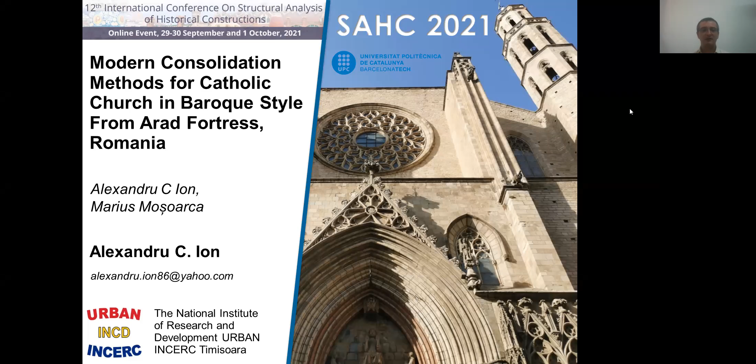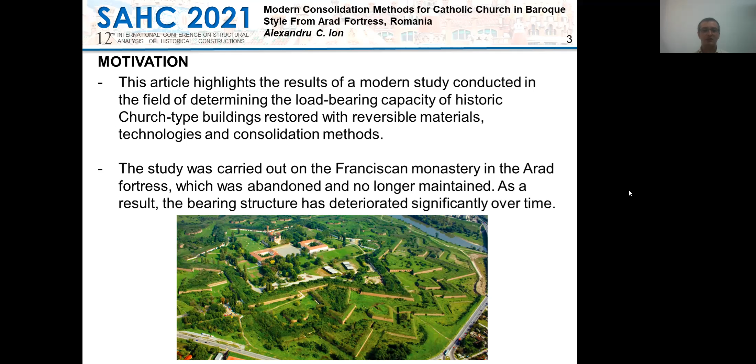This article highlights the results of a modern study conducted in the field of determining the load-bearing capacity of historic church-type buildings restored with reversible materials, technologies, and consolidation methods. The study was carried out on the Franciscan monastery in Arad Fortress, which was abandoned and no longer maintained. As a result, the bearing structure has deteriorated significantly over time.

The construction of the fortress of Arad was ordered in 1762. The Franciscan church was already existent when the construction began. To determine the most effective structural analysis and structural intervention on the Franciscan church, several studies were conducted to help choose a minimum reversible intervention on the bearing structure of the church.

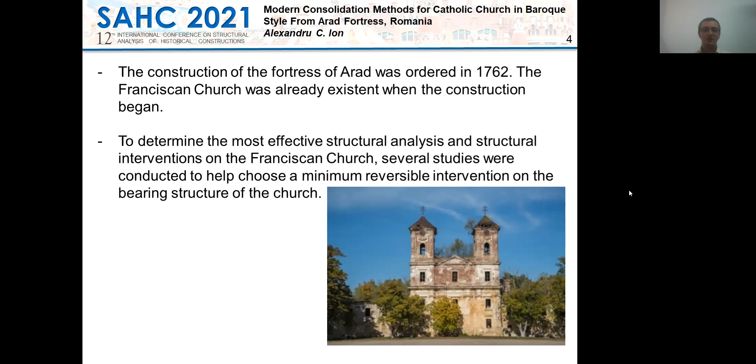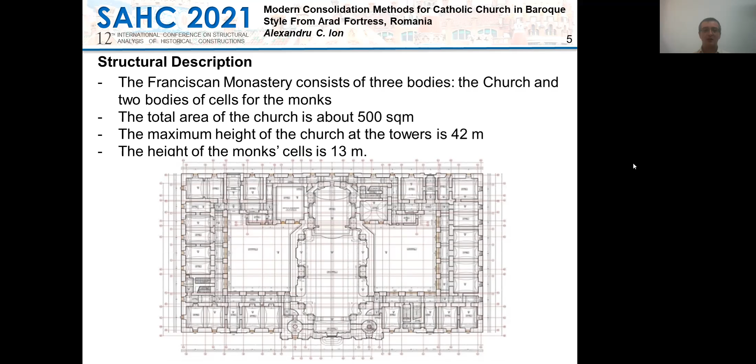The Franciscan monastery consists of three bodies: the church and the two bodies of cells for the monks. The total area of the church is about 500 square meters. The maximum height of the church at the towers is 42 meters, and the height of the monks' cells is 13 meters. The bearing structure of the monastery is made out of burnt brick masonry with a mortar binder.

The structural system consists of masonry walls, pillars, arches, and vaults. Over the vaults, there is a wooden bearing structure of the roof and the roof cover.

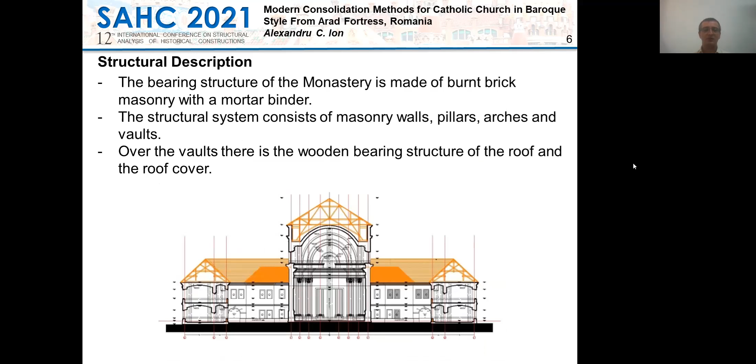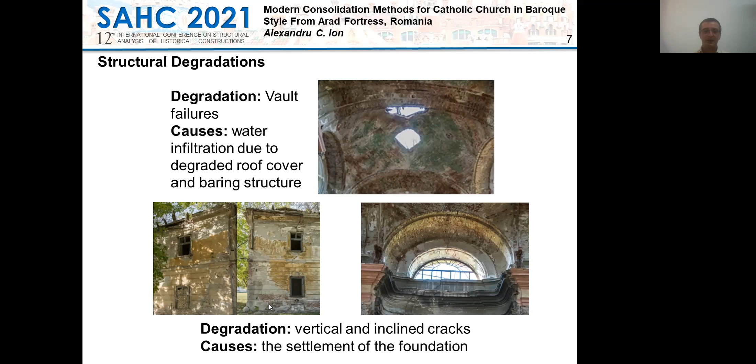At an on-site visit to the monastery, several structural degradations were observed: vault failures due to water infiltration from degraded roof cover, vertical and inclined cracks due to the settlement of the foundation, and degraded masonry due to water infiltration from rainwater.

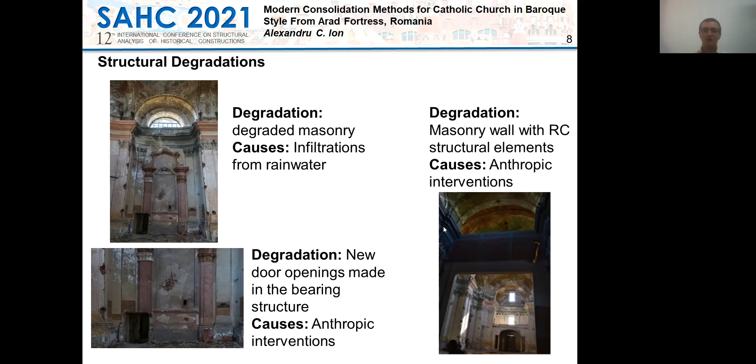Anthropic interventions like door openings made in the bearing structure, and a masonry wall with reinforced concrete elements. Vegetation grown on the walls and vaults of the building due to the degradation of the roof cover and bearing structure, and corrosion on a reinforced concrete arch due to water infiltration and the freeze-thaw phenomenon.

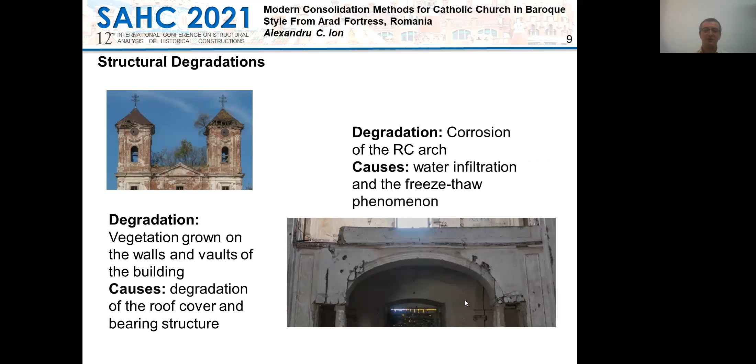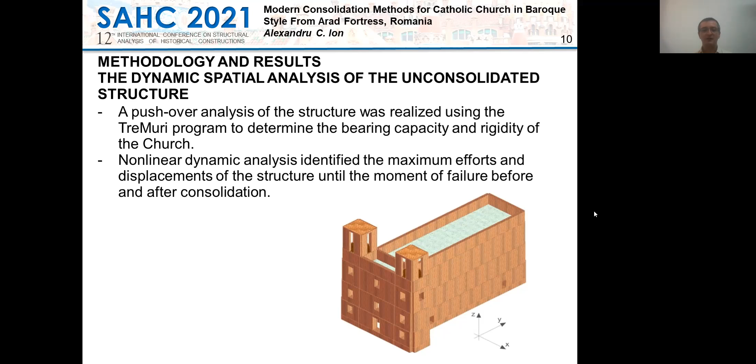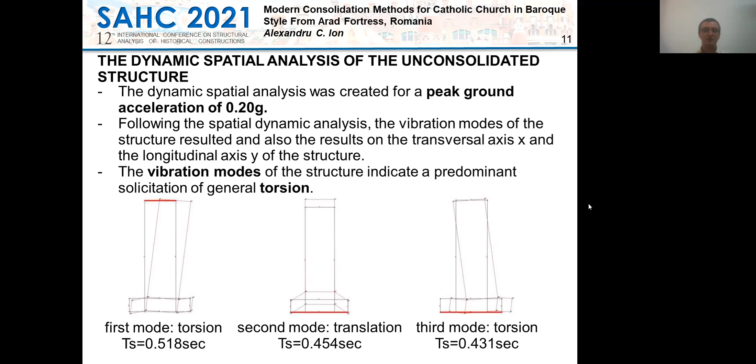The dynamic spatial analysis was created for a peak ground acceleration of 0.20 g. Following the spatial dynamic analysis, the vibration modes of the structure resulted, along with the results on the transversal axis X and the longitudinal axis Y of the structure. The vibration modes of the structure indicate a predominant solicitation of general torsion.

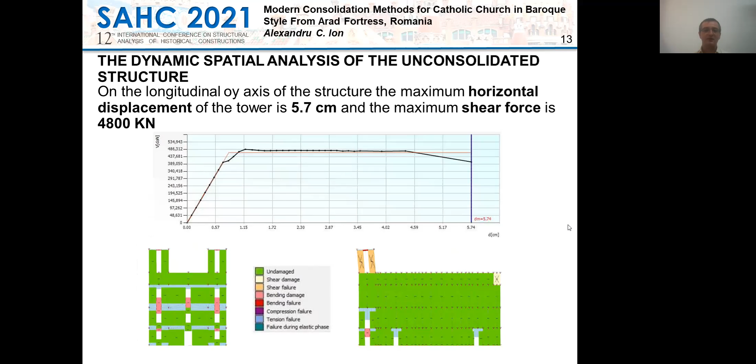On the transversal OX axis of the structure, the maximum horizontal displacement of the tower is 2 centimeters, and the maximum shear force is 6,200 kilonewtons. On the longitudinal OY axis of the structure, the maximum horizontal displacement of the tower is 5.7 centimeters, and the maximum shear force is 4,800 kilonewtons.

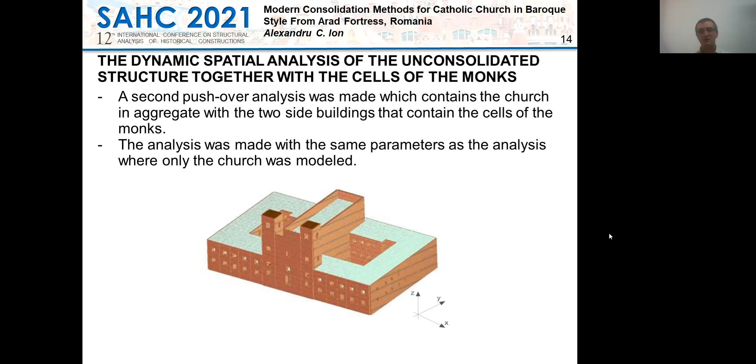A second pushover analysis was made which contains the church in aggregate with the two side buildings that contain the cells of the monks. The analysis was made with the same parameters as the analysis where only the church was modeled.

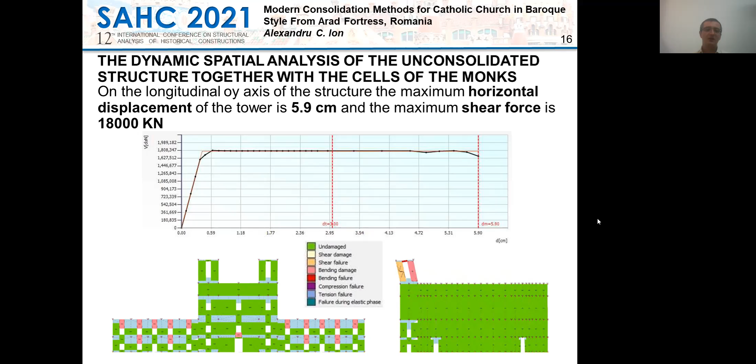On the transversal OX axis of the structure, the maximum horizontal displacement of the tower is 1.3 centimeters, and the maximum shear force is 15,000 kilonewtons. On the longitudinal OY axis of the structure, the maximum horizontal displacement of the tower is 5.9 centimeters, and the maximum shear force is 18,000 kilonewtons.

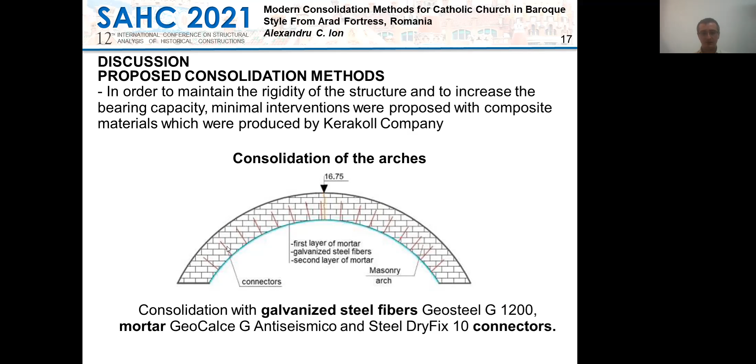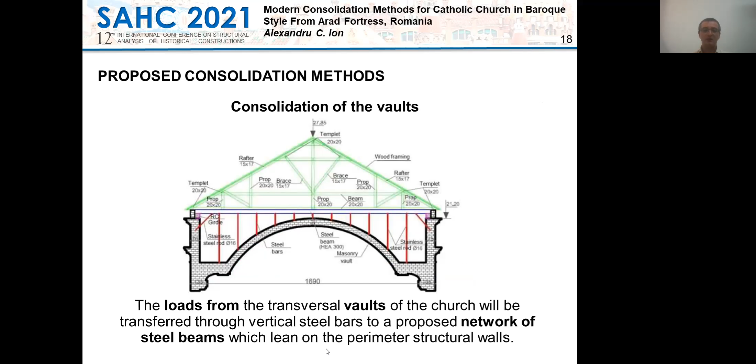The loads from the transversal vaults of the church will be transferred through vertical steel bars to a proposed network of steel beams which lean on the perimeter of the structural walls.

A consolidation of the walls will be done punctually with galvanized steel fibers, hydraulic lime mortar, and connectors.

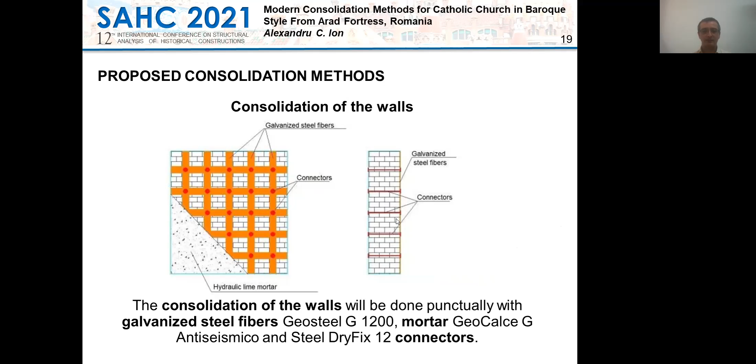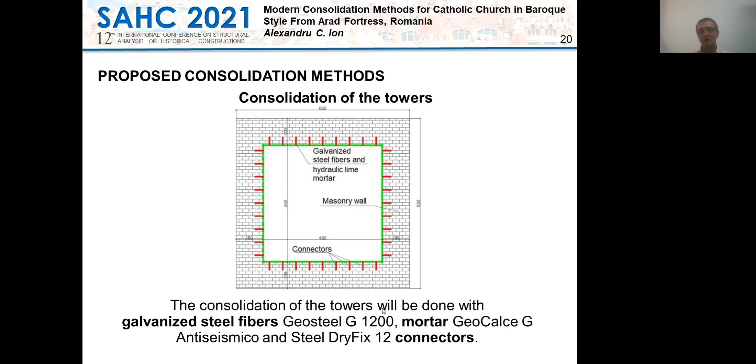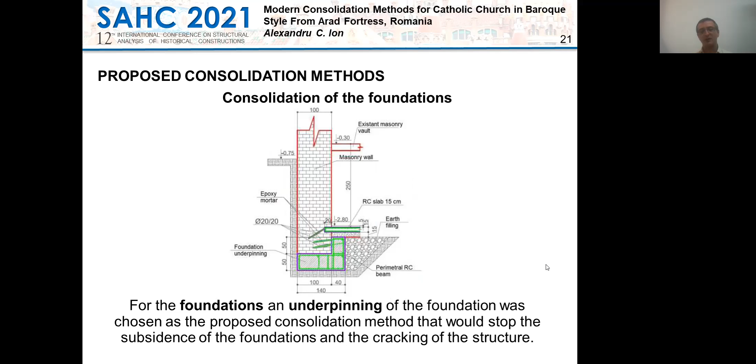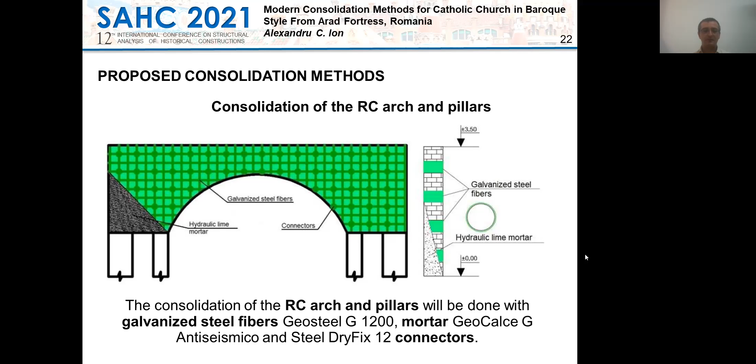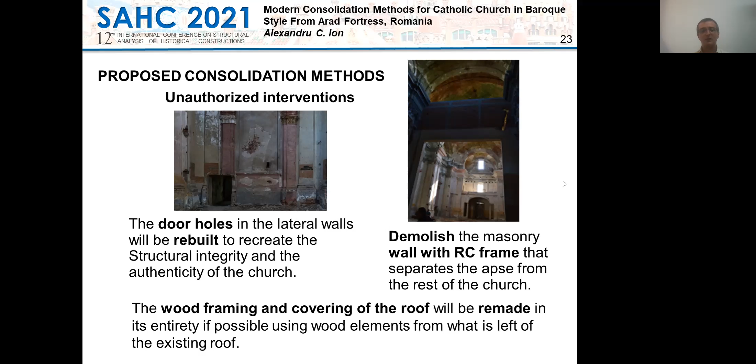The wood framing and covering of the roof will be remade in its entirety, if possible, using wood elements from what is left of the existing roof.

To determine the efficiency of the consolidation methods, a third nonlinear analysis was made with the TreMuri program that contained some of the consolidation methods described above. The analysis was made on the simple model with the church as an independent building.

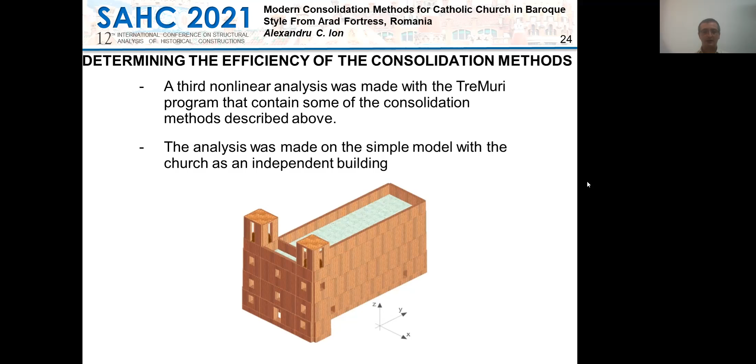The analysis indicates that on the OX axis, the shear base force grew to 10,800 kilonewtons, and the horizontal displacement at the top of the tower went down to 1.6 centimeters.

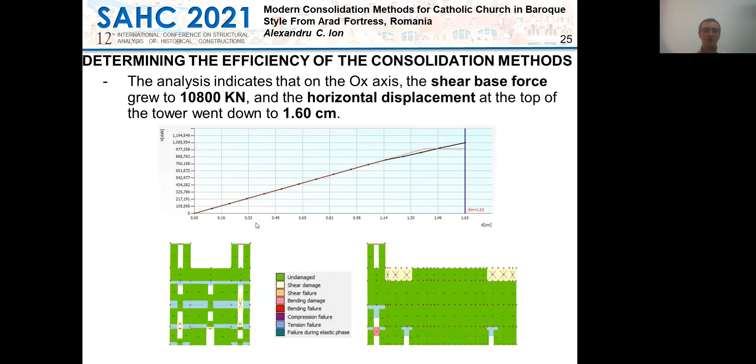On the y-axis, the force displacement diagram indicates an increase of the base shear force to 15,000 kilonewton and the reduction of the horizontal displacement of the tower to 4.9 centimeters.

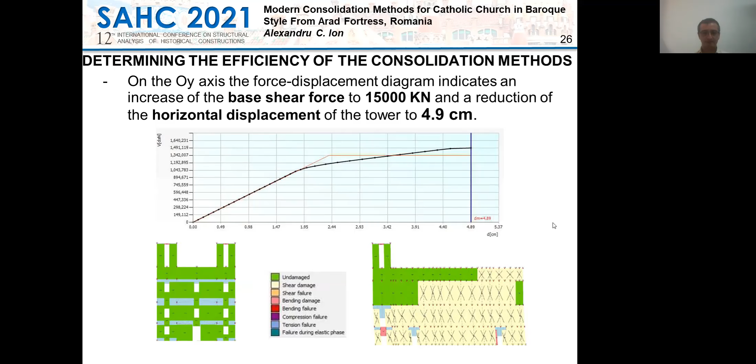A comparative study was made for the results of the non-consolidated structure and the results of the consolidated structure.

The comparative growth between the base shear forces on the transversal axis X grew by 74%, and on the longitudinal axis Y by 213%. The comparative reduction between the maximum displacements on the transversal axis X went down by 20%, and the longitudinal axis Y went down by 14%.

There also was a comparative study for the vibration modes of the structure.

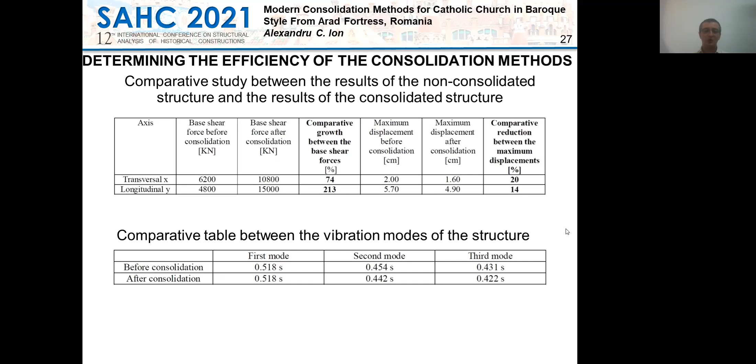In conclusion, this paper represents the first time in Romania that a study of the bearing capacity of a historic Baroque style church was done.

The studies will continue with on-site testing to figure out the exact properties of the materials used in the construction of the church. The dynamic analysis utilized to diagnose the Franciscan church permitted the identification of the structural strength before and after the consolidation and the identification of the proposed consolidation solutions used to restore the historic architectural surfaces.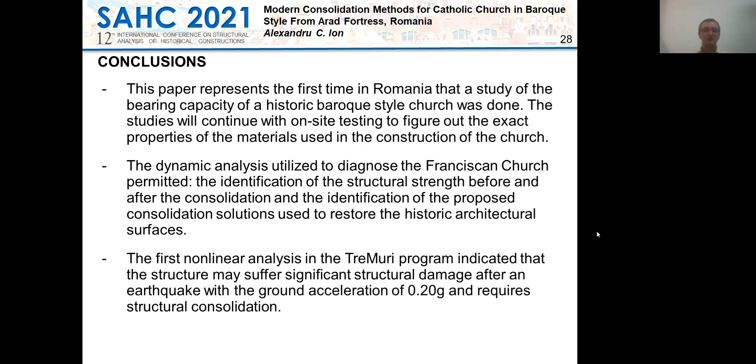The first nonlinear analysis in the TreMuri program indicated that the structure may suffer significant structural damage after an earthquake with the ground acceleration of 0.20 g and requires structural consolidation.

The second nonlinear analysis indicated that the building would have a higher structural resistance if the two adjacent bodies would be taken into consideration in the model.

The structural consolidation was made with modern reversible technologies that do not affect the historical value of the building. The unauthorized interventions made to the structure were eliminated to re-establish the structural resistance and the authenticity of the building.

The third nonlinear analysis indicates that the structural resistance of the consolidated building significantly increased compared to the unconsolidated structure. Also, this analysis shows us that the number of structural elements in the consolidated area of the towers that suffered failure modes were reduced.